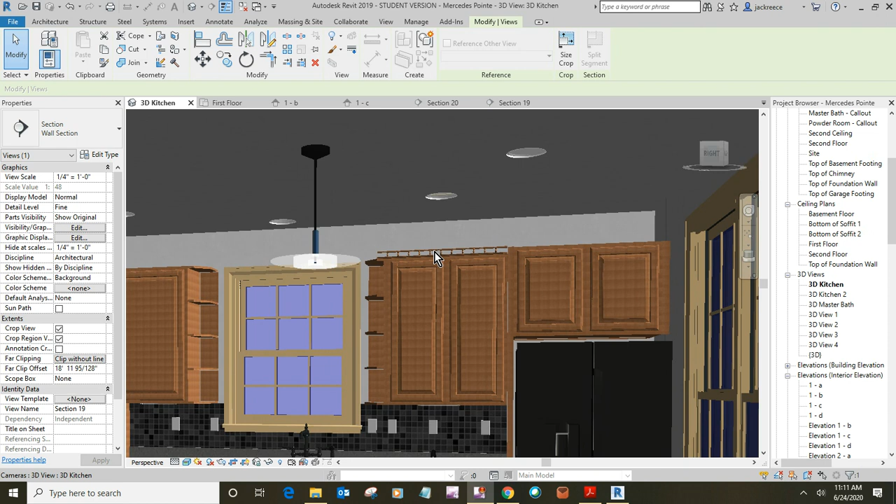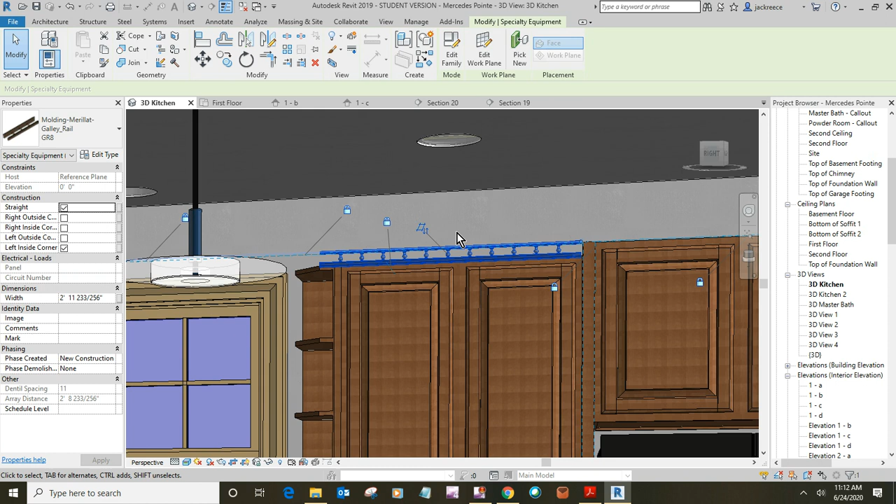Especially with higher end type kitchens, it's normal to put some kind of decorative molding across the top, whether it be crown molding or this, I think this is called picture gallery or gallery rail, can go there. Normally, a crown molding of some kind would go between the cabinets and the ceiling, or you may get a light rail across the bottom to kind of hide anything underneath there and kind of tie everything together.

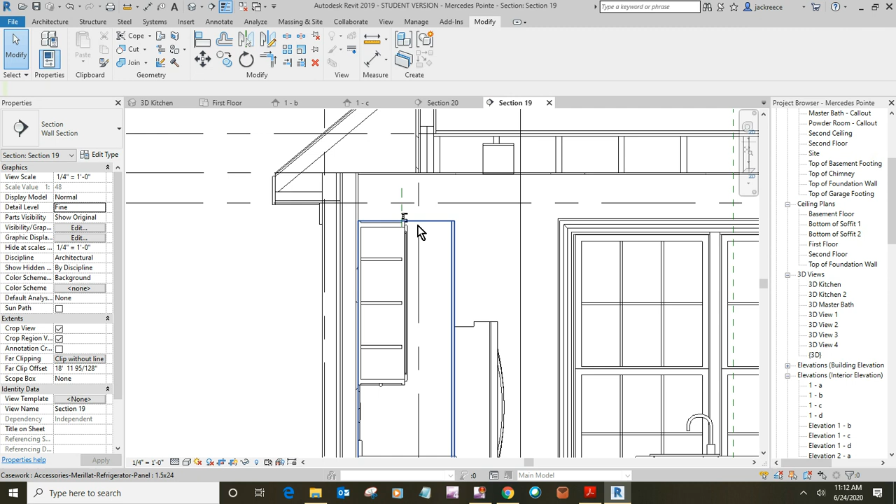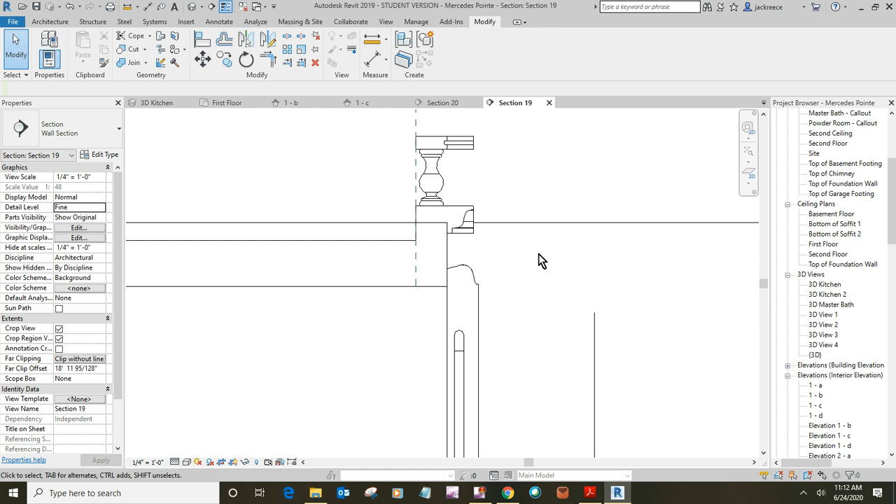The issue with these things, and I've tried several different ones, I'll show you here. By default, these things want to install with the back edge as the reference plane of the molding family, and it wants to install way out at the front to the face frame, but that's not how the thing is actually created.

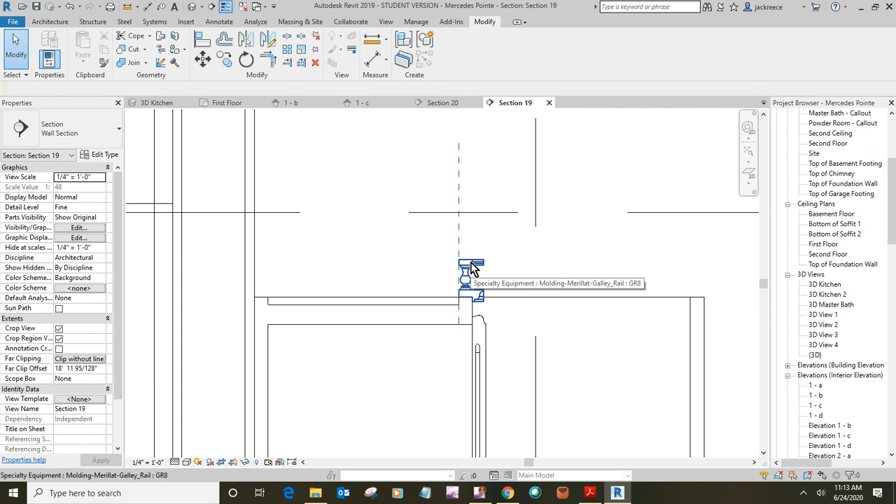So what I had to do is create a reference plane in my project that was 3/4 of an inch back from the face of the cabinet frame. Then you can install one of these trim pieces. It took some playing to get it oriented correctly, hosted on the face frame of the cabinet. Then I had to pick new host, and in doing that, I could put it on this reference plane and then adjust the height so it would align to the front or the top of the cabinet.

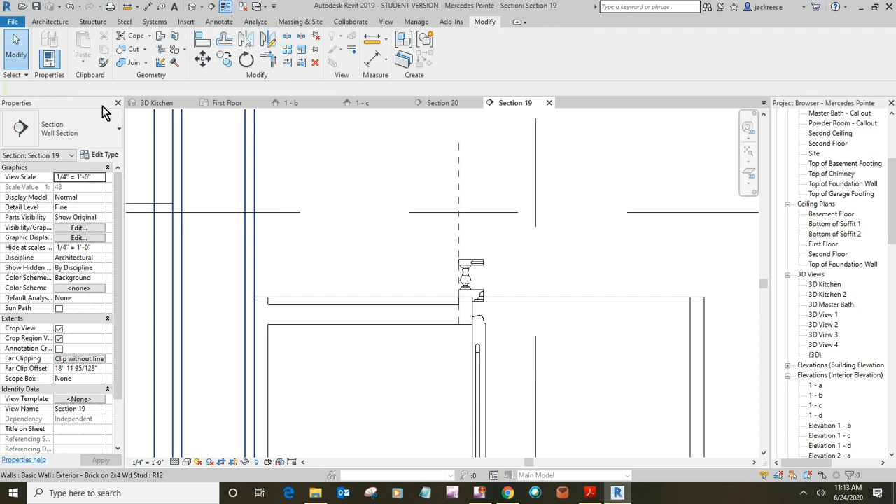It was a lot of work, okay? And the reason I'm not going to require you to do it is not that it's a lot of work. I don't care, I'll work you to death. That's fine, you've seen that having you do a lot of work doesn't bother me.

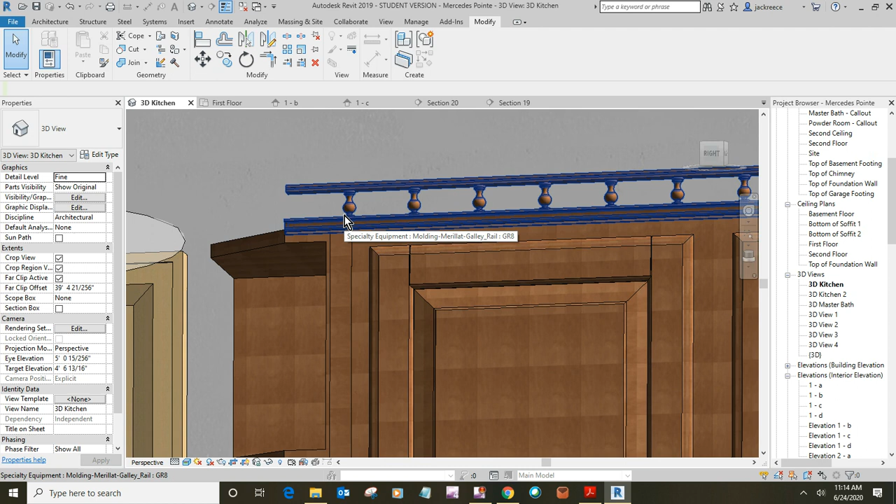The problem is the corners with this. There's not a good way to do a 45 miter corner to go back across the top of these little shelves that I thought would be interesting to put into the project. So that's why I'm not doing any trim across the top or the bottoms. If you choose to not do these shelves, you could do some trim and it would look like a better project and it would certainly work better.

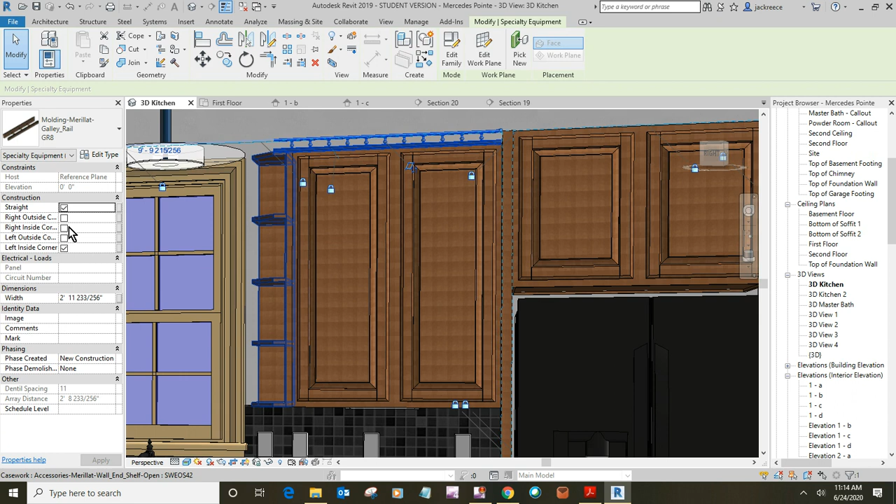Just like the base trim, you can do an inside corner, outside corner return on one of the pieces, and then it would put that in for you. But kid you not, it is kind of a lot of work. I've got a couple of them loaded in here, so come on.

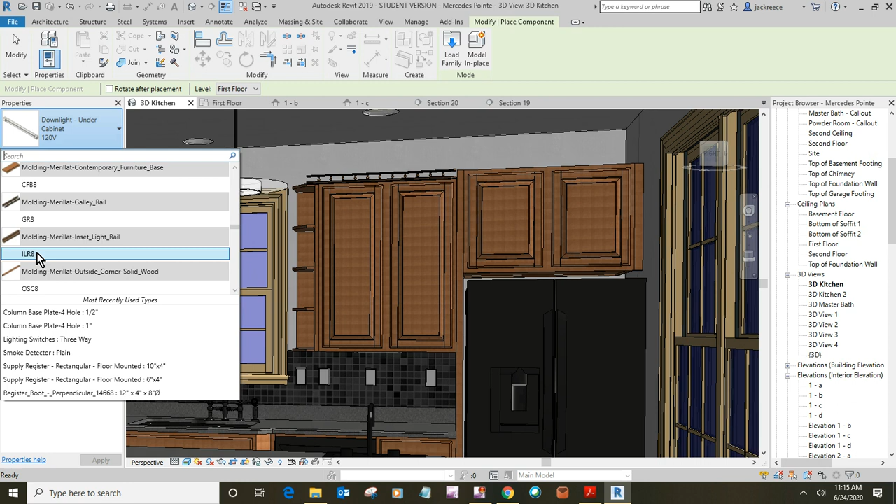Where's my molding? I will start with one: angle crown, perch base, inset light rail. Okay, I'm going to go with that one. As you can see, it's in a vertical orientation right now, so I hit my space bar and it'll pop over to a horizontal. But I want to come in here and get it.

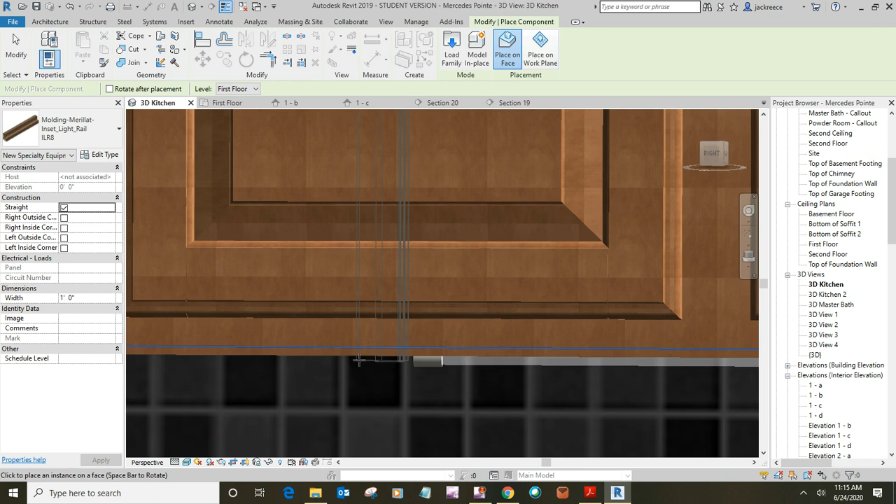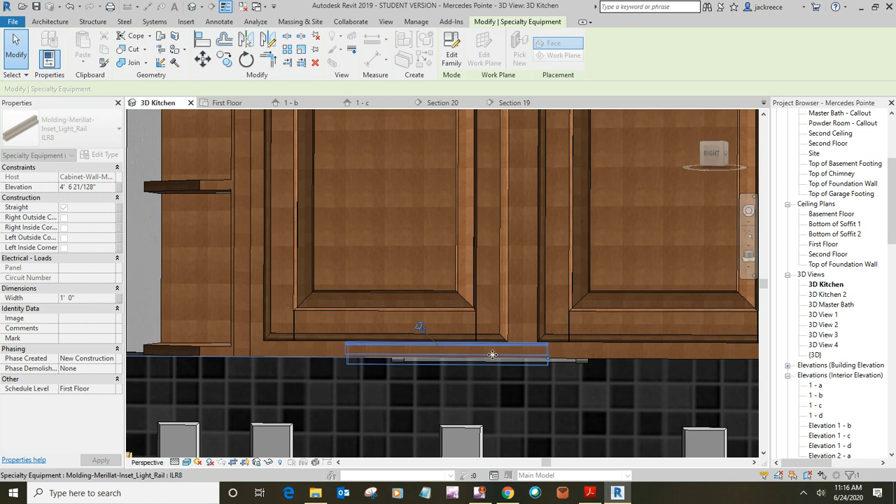I'm going to put it there so you can see what we're dealing with. So you can see it made it that way. I don't think that's going to be in my section view. Didn't pull it down far enough. Oh, the dishwasher.

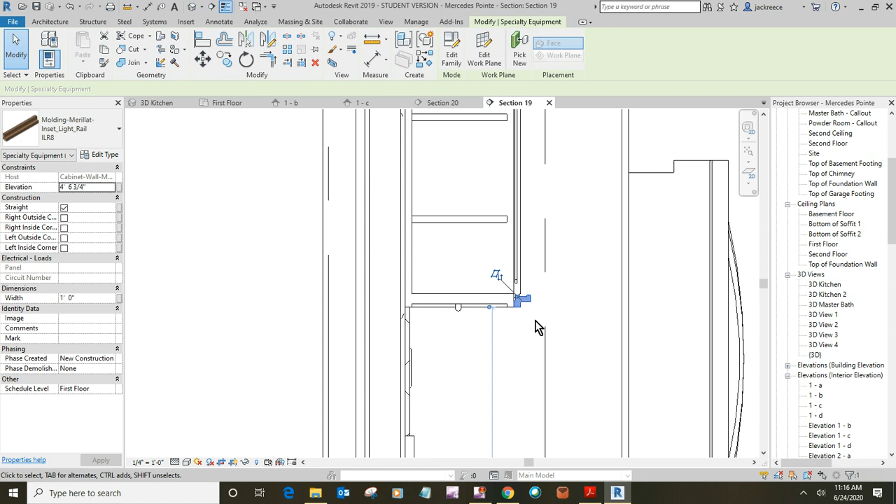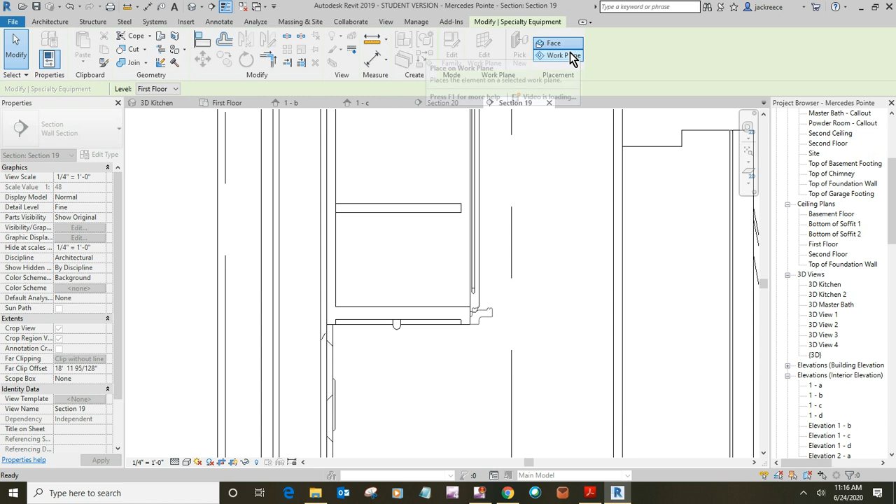Now the problem with this is that this edge right here needs to be on the bottom of the cabinet. So let's see if I can pick a new work plane, pick a plane, and let's go to elevation 1C.

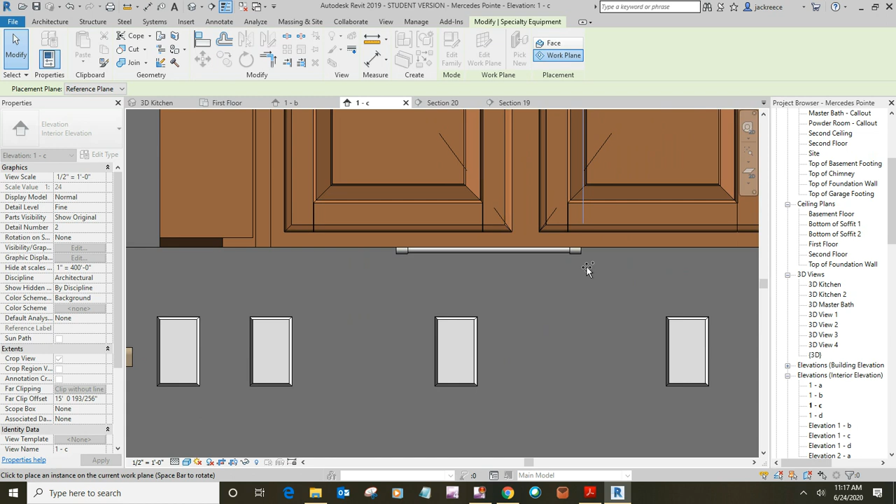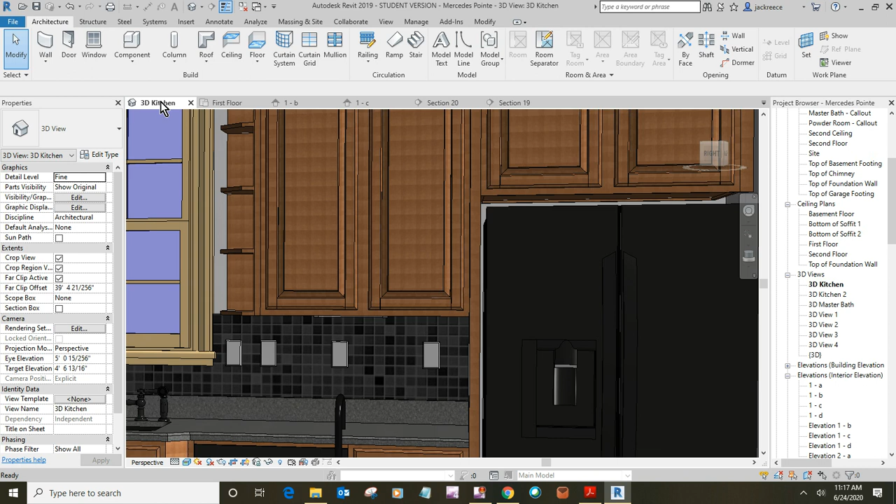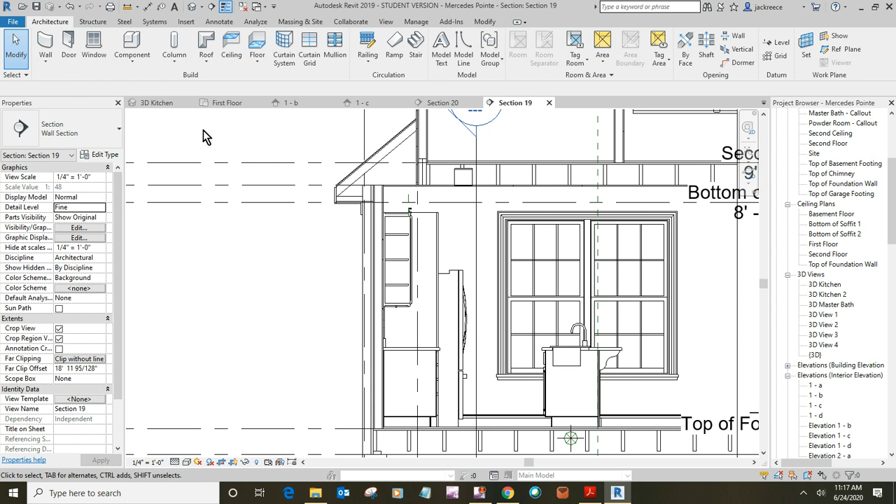I don't see where it went. Because it took a while to figure out how these things work, and it may have popped into the floor or somewhere up into the ceiling. It was kind of weird working with them. If you lose something, you can go to your families. And it's weird, some of these things are considered specialty equipment.

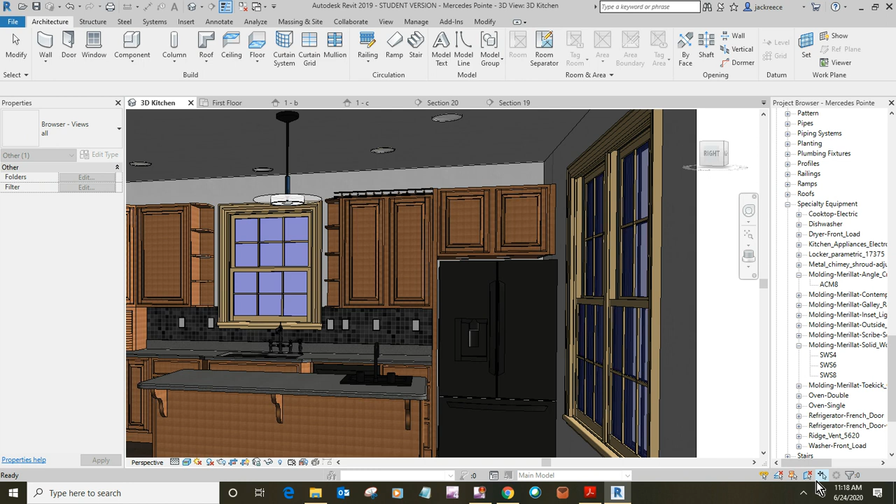Inset light rail. I go select all the entire project. Okay, so there it is.

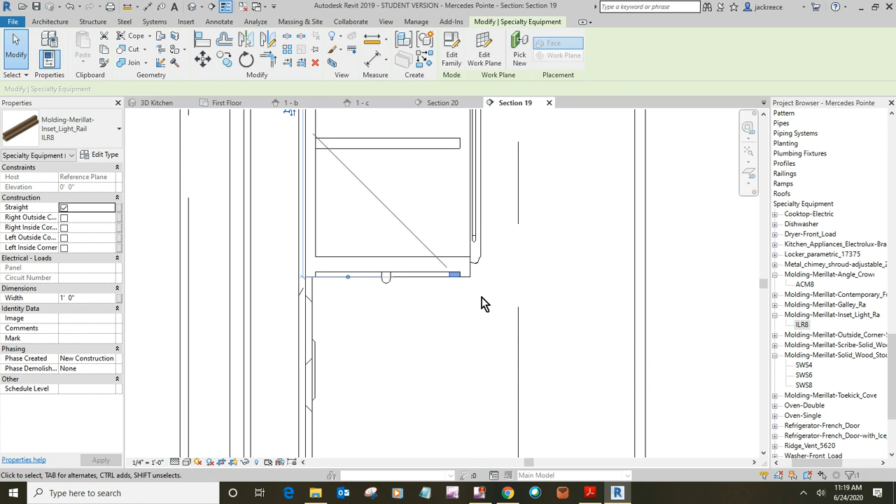So maybe with this one, I need a reference plane at the bottom of the cabinet. Because I don't know that, anyway, you have to deal with some reference planes and things to get those to work. So that's why I didn't do them all the way across, because I really couldn't make it work well with these little shelves that I put in.

Okay, let's talk about the island. Pretty standard. You've got a sink base cabinet here, standard double door with drawers there. This one is a wastebasket pull-out cabinet.

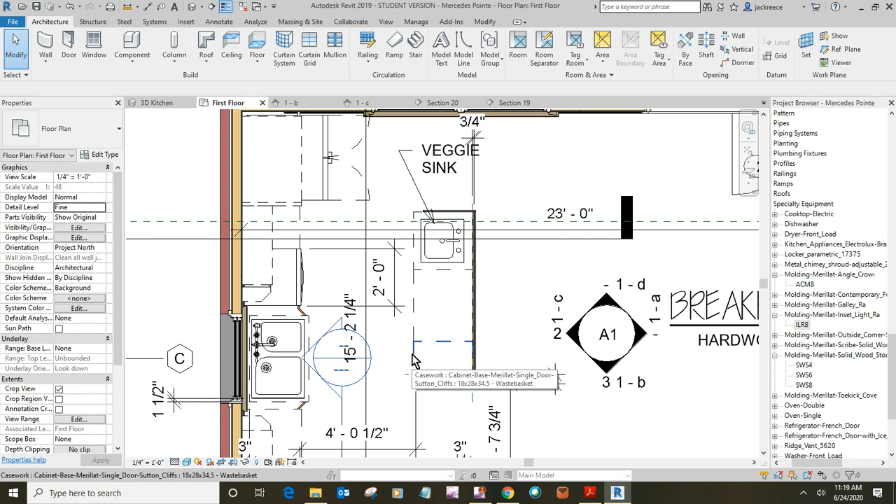On the handout that I gave you, I'm giving you dimensions from the face of the chipboard walls to the edge of the cabinets. I'm not dealing with the front edge because of the weird things, the way that these things go. But you'll get those three put in place, pin them in place.

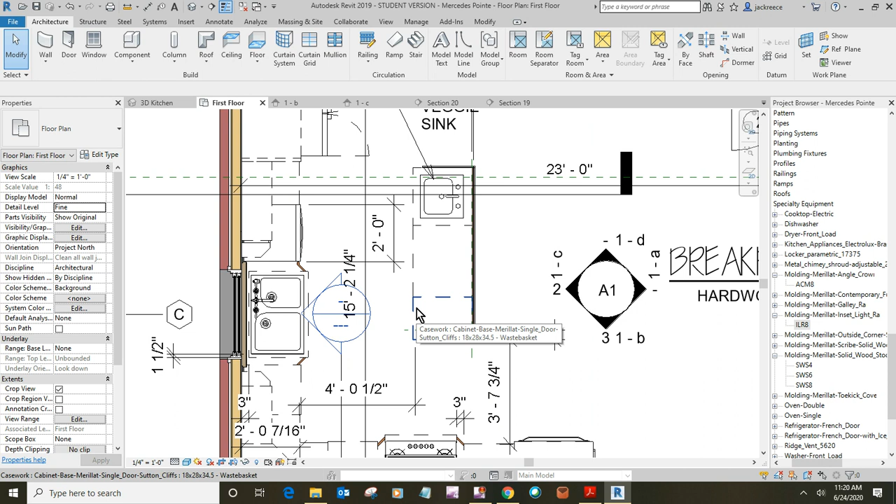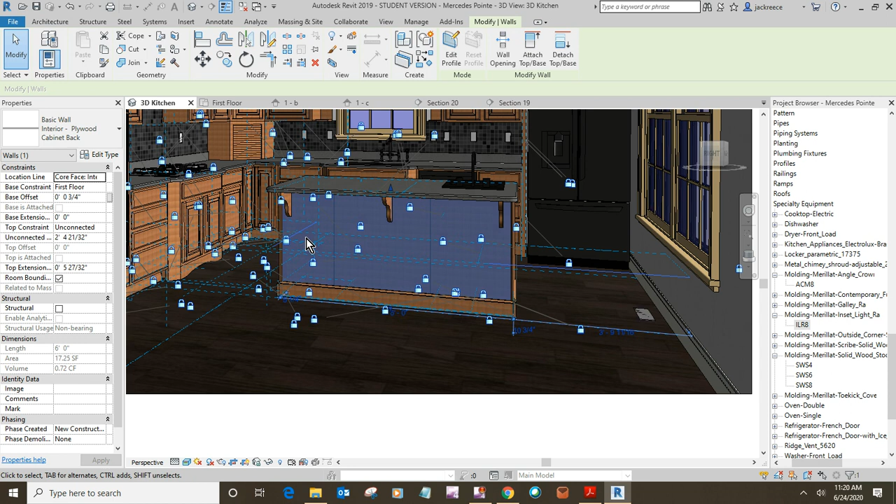You remember doing a plywood backer to cabinets? So we did one here, 1/2 inch thick with the hazelwood finish to it. The length of the cabinets, and it goes from the floor up to the top of the cabinet itself.

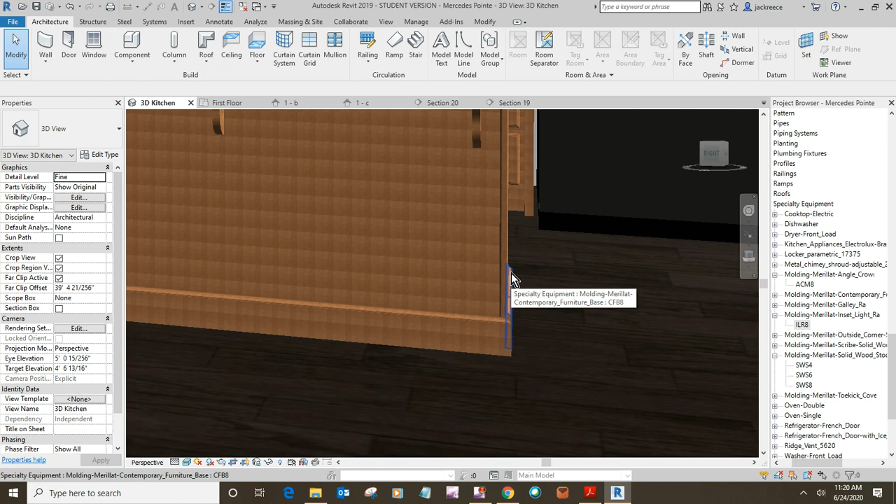I did this furniture base trim around 3 sides of the cabinet, but stopped it at the edge of the toe kick. Okay, or you could do a panel down and cover the toe kick. That works too. Okay, these are outside corner molding, and with them I did have to do a reference plane.

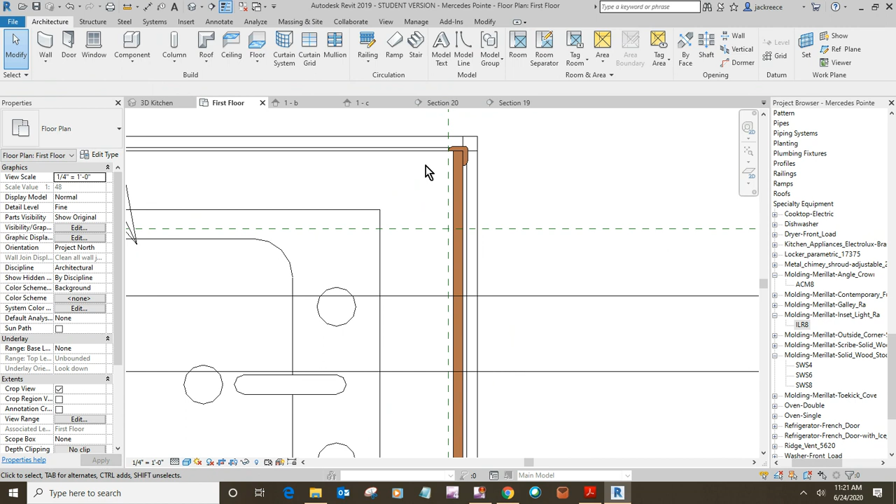I created this reference plane here, 3/4 of an inch back from the outside face of the plywood that I just added. And then when I put this outside corner molding in, I hosted it on this particular plane. Had to do some mirror or maybe a rotate to get it the same on both ends.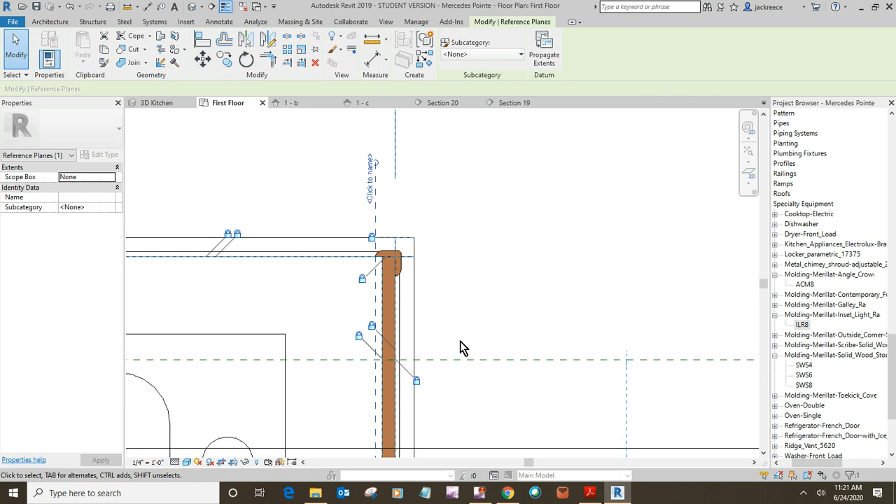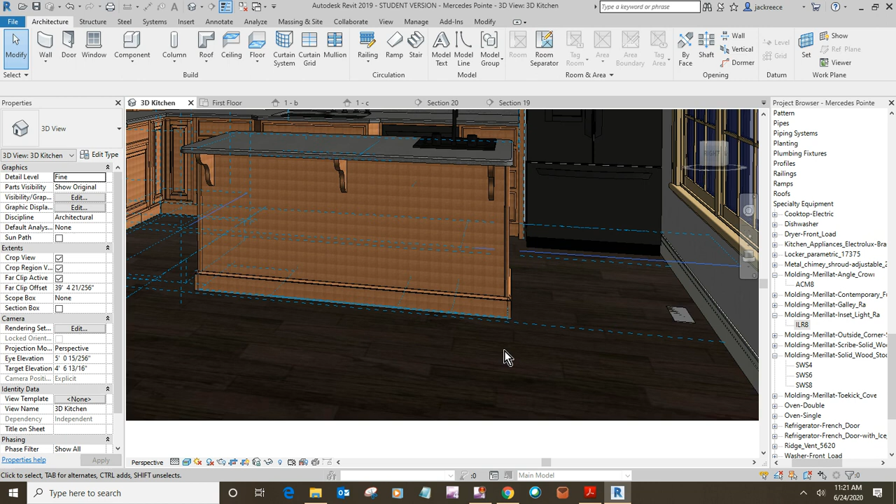Okay, and so there's one there, right there. And those go from the top of this furniture base up to the bottom of the countertop. As you can see here, top of the furniture base, and it goes up to the bottom of the countertop.

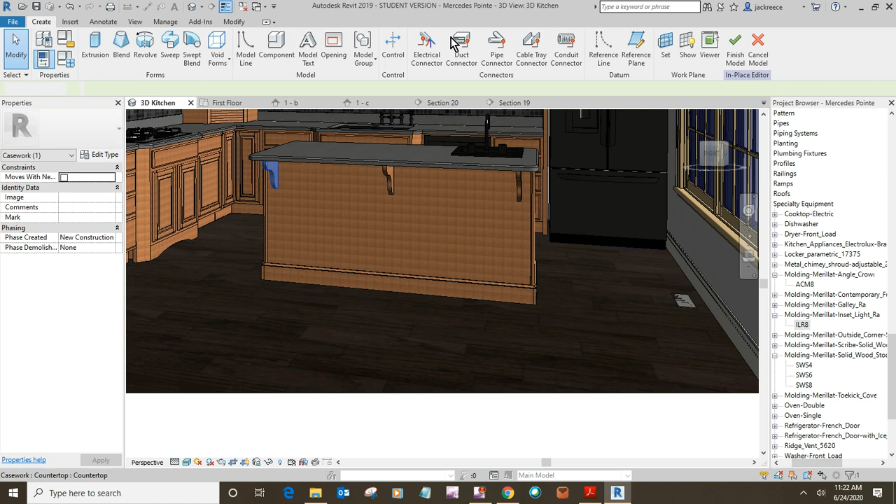Okay, if you look in your catalog, there's these countertop overhang supports. They don't have them in the downloads, so I modeled them in place. And they're basically 9 inches by 9 inches. Okay, and...

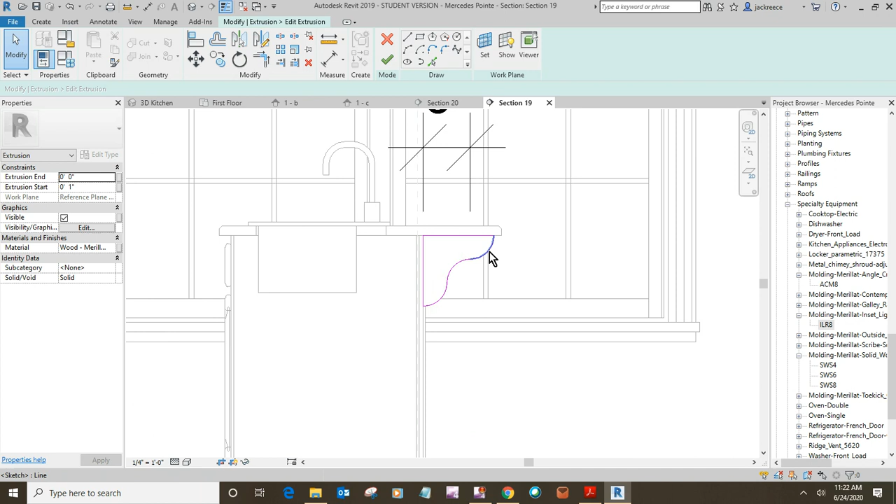Can I see it here? They're 9 inches by 9 inches, and they've got these curves. I don't know what the exact sizes of them are, but I did my sketches, 9 inch up, 9 inch out. I did 2 circles here with a 3-inch radius, and tied those and got them into place.

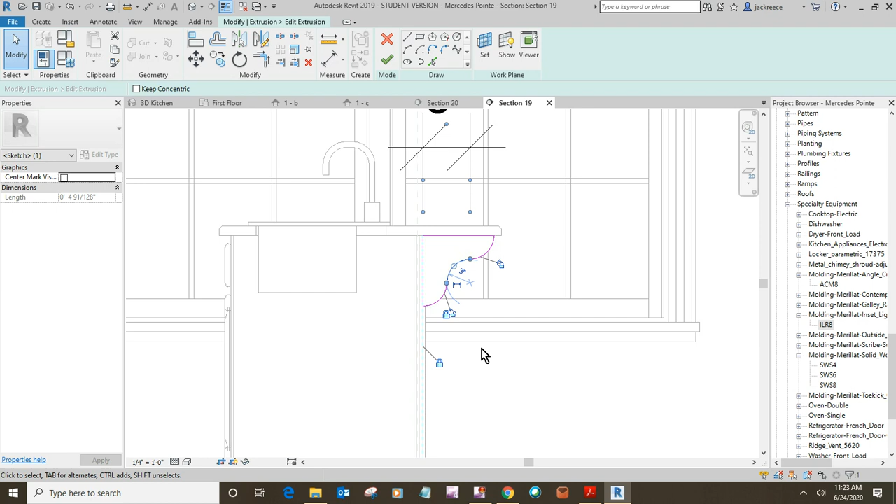And then here, I did an arc that is tangent. I may have had to draw some lines to get that thing to work, but I basically did a fillet arc with a 3-inch radius and then trimmed that out, extruded it to 1 inch thick, and did the Merillat wood finish to it.

And when I was installing them, I created a reference plane here that was 4 inches over and did my sketch and extrusion off of that reference plane.

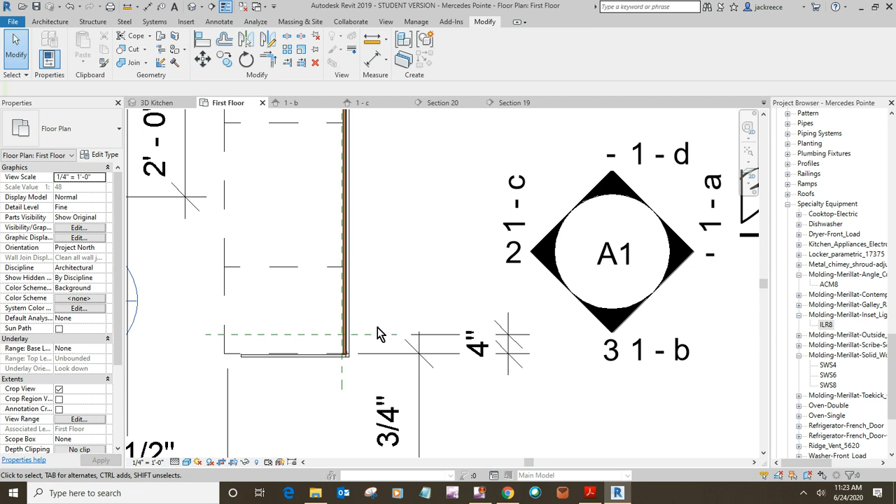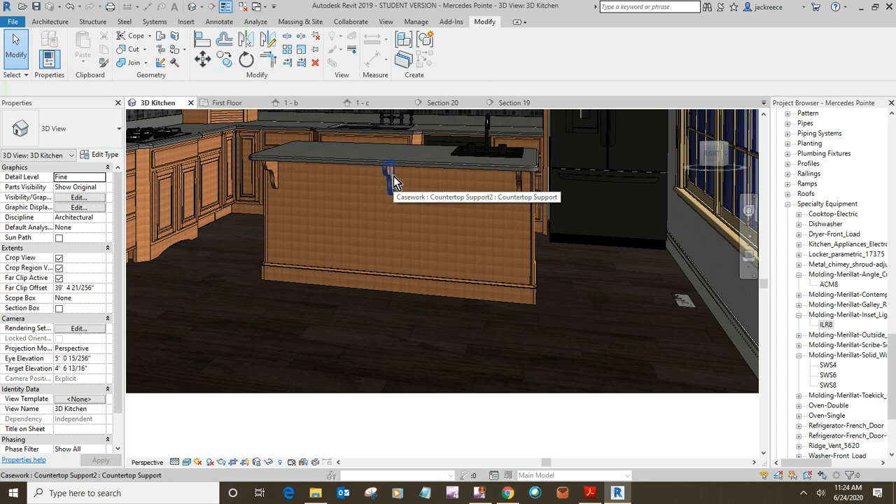And then just to make it easier, I did another reference plane here that was 4 inches down, copied one from here to there, figured out the distance into the middle. Let's get back to 3D here, and then copied another one into here. So I've got 3 of them. This one's in the center of the island. The other 2 are at 4 inches in.

Okay, and then the countertop here, I tried bringing in the standard Revit island countertop, and it did not want to edit to something less than 4 feet. It just was cantankerous, okay?

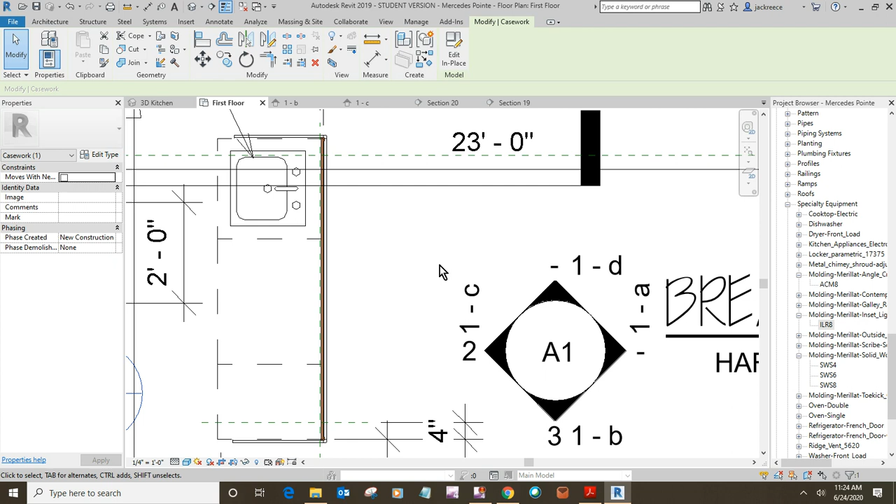So I just extruded it just like, let me go back. Oh, I can go edit here. I extruded it just like the other countertop. I made my sketch, a 1.5-inch overhang to the front.

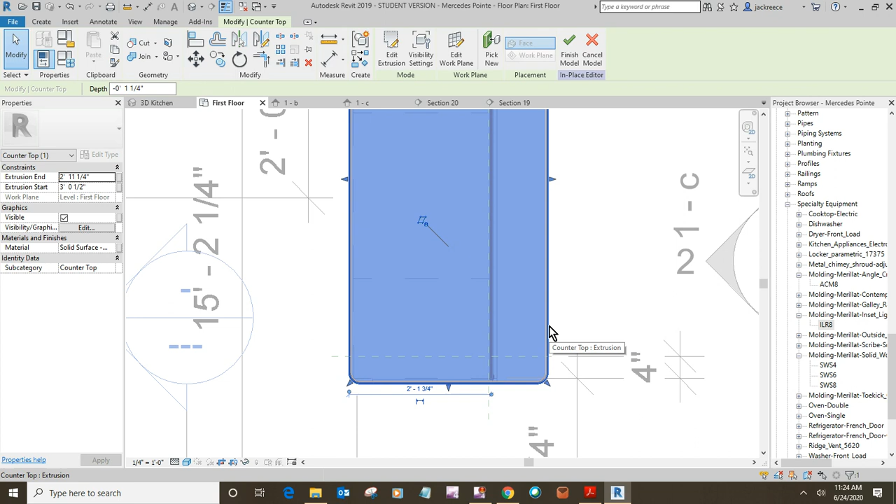I think I did, yeah, 1 inch overhang to the ends. 1 inch overhang here, 1.5 inches here from the face frame, 1 inch down here, and then 10 inches here from the face of the plywood, because we want a 10-inch overhang.

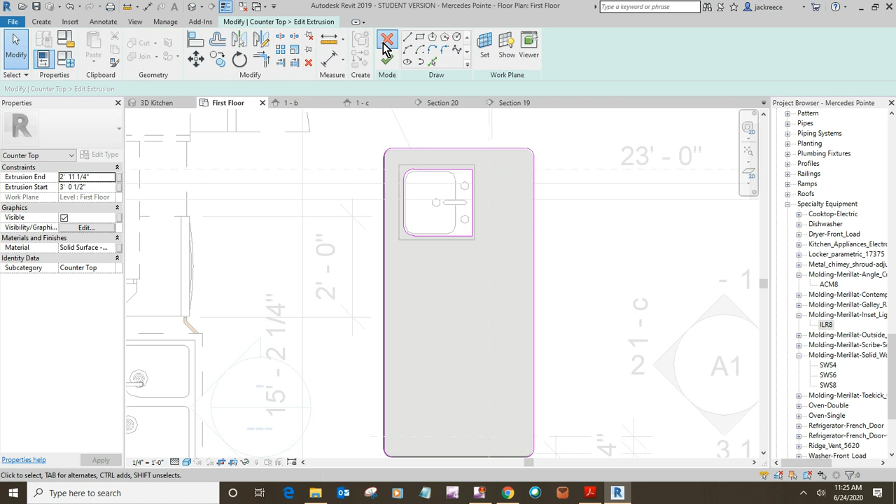And then I did a fillet arc with 2-inch radius at all 4 corners, and then extruded it to be 1.25 inches thick, just like before. And then I came back and did the void extrusion of the chamfer all the way around, brought in my island sink, put it in place, and then went back and edited and cut a hole in the actual countertop. And that got the island done.